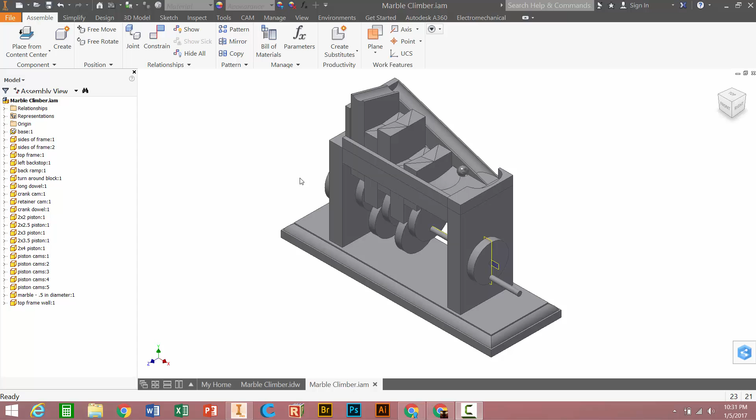So you finished assembling your marble climber and you're ready to start your documentation. Let's take a look at that.

On the first page, you're going to have a cover page with a nice isometric view of our assembly. Page 2 is a parts list with an exploded view, and I'll come back to this in just a minute. Page 3 is a multi-view of our assembly with an isometric in the corner, kind of a standard multi-view layout.

All right, the rest of the sheets or pages you do not have to do. Those are just there for you to make all the parts and pieces needed to create the assembly. Also remember to put all your sheets in one file. Right click, new sheet, and you can add as many sheets as you need, but in this case you would have 3 sheets in your browser.

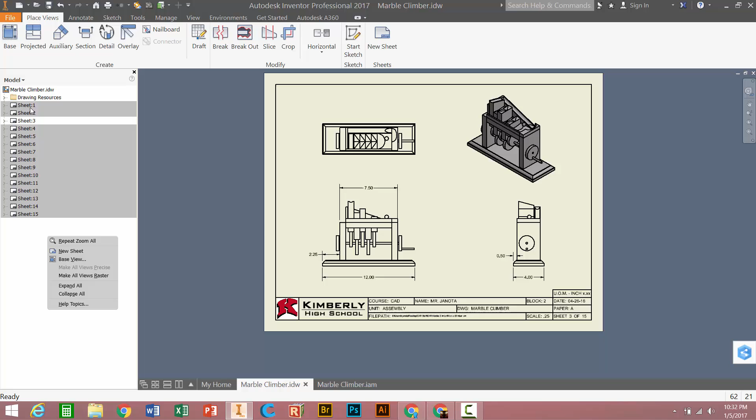All right, let's look back at sheet 2. Both these things are kind of new to us. First of all, we have what's called an exploded view. So we have to create a file where we actually pull these things all back apart.

And I know we spent all that time putting them together, but we can create this cool little animation with a certain file called a presentation file. And then once we have this in here, we can drop in our parts list. Okay, so let's get started.

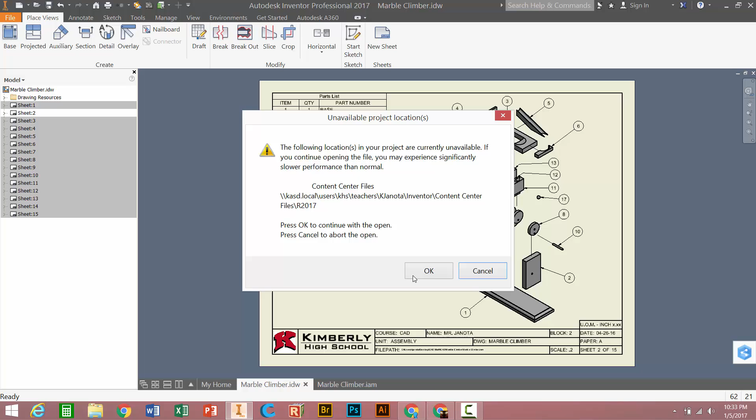We're going to start a new file, and we're looking for a standard IPN file. Don't worry about that, it's just a box I get on my laptop.

And right away the file is asking us to choose something to put into it so we can do some work, and we're looking for our marble climber file. And here it is. It's kind of similar where we have our browser on the left and there's this snapshot window here that we're not going to use at the moment.

There's a storyboard on the bottom, which means kind of a video or animation, and we'll get to that at the end of the file here.

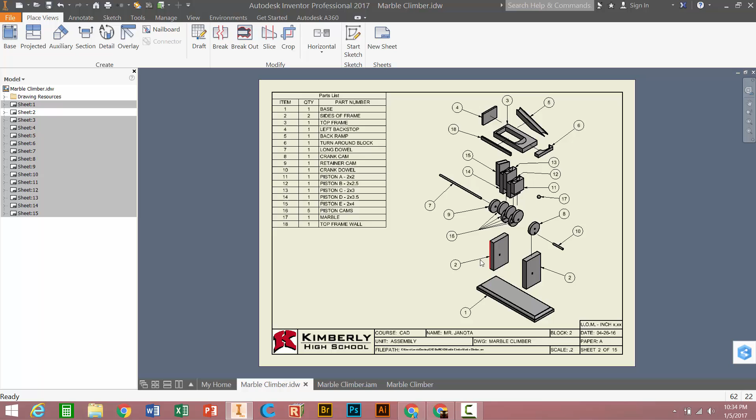What we need to do is, again, remember, look back at your drawing file. It'd be great if you throw this up on your other screen. We're going to pull our object apart, and you're just going to visually look at the spacing of all the parts when we're recreating it in this file here.

So with that, the tool we're going to use to do everything is called the Tweak Components tool. You get the little window that pops up, and the only thing we really have to do here is change where it says All Components - we're going to set it to No Trails.

Trails are like lines that get left as we drag things apart, and sometimes they're just busy and don't look very nice.

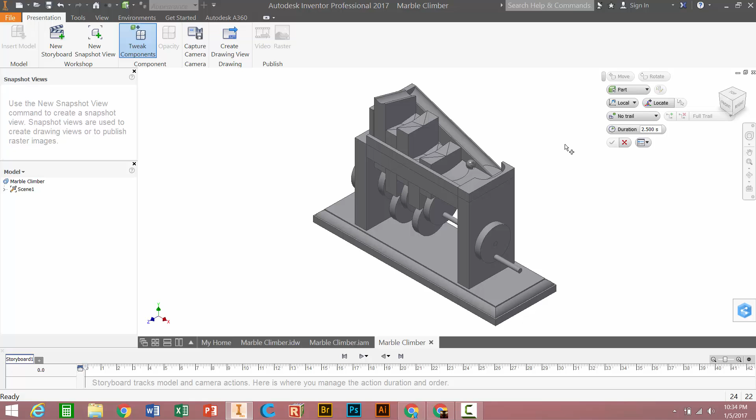So with that, we are going to - sorry, I'm just adjusting my other screen so I can look at the document and recreate what we need to.

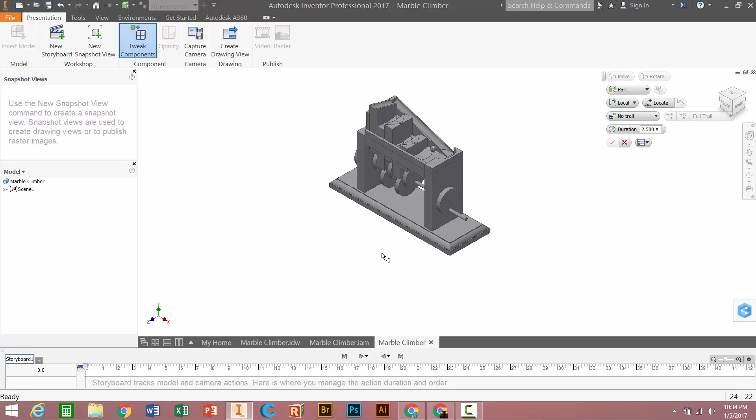We're going to pull the base down, so this is a good practice part to start with. You're going to just click on the object you want to move, and you see you get the triad that shows up. I'm just going to pick the axis - even though the arrow is up, I can really slide it in both directions. So it's the z-axis, y-axis, but to me it's up and down.

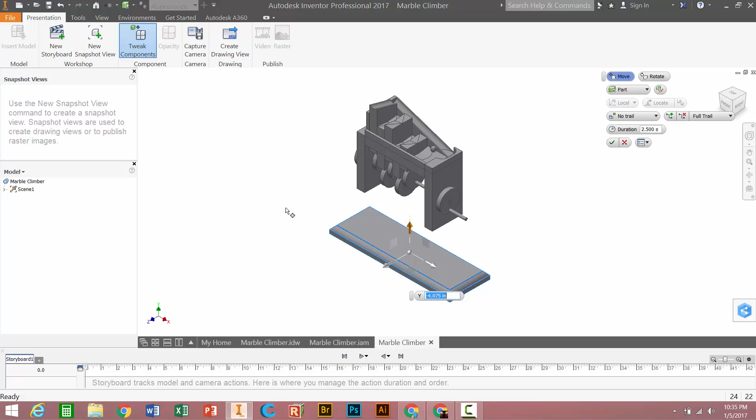Just grab that arrow and pull this part down a little bit, and right about there's the spacing I'm looking for. We could hit apply and cancel the window and go right back into it, or you should be able to just double or click on the next component and move it as well.

Looking at the drawing, we actually leave the 2 end pieces alone, and now everything else needs to move up. So while I'm holding the shift key, I'm just going to start clicking on all the other components on the screen.

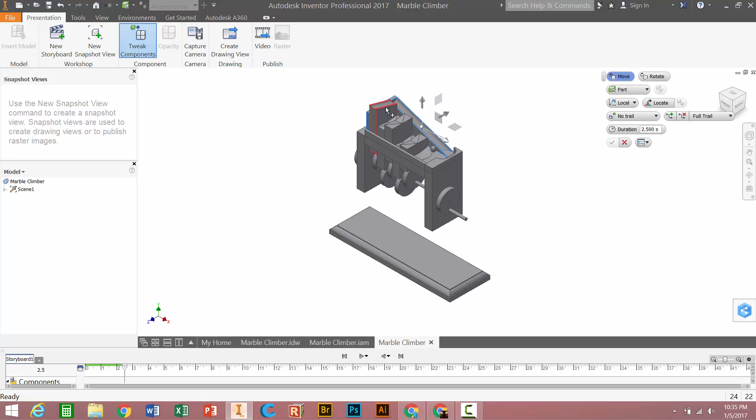There it is. Sometimes you have to zoom in. The other thing you can do is you could always expand this over here, and there you can see all our files as well.

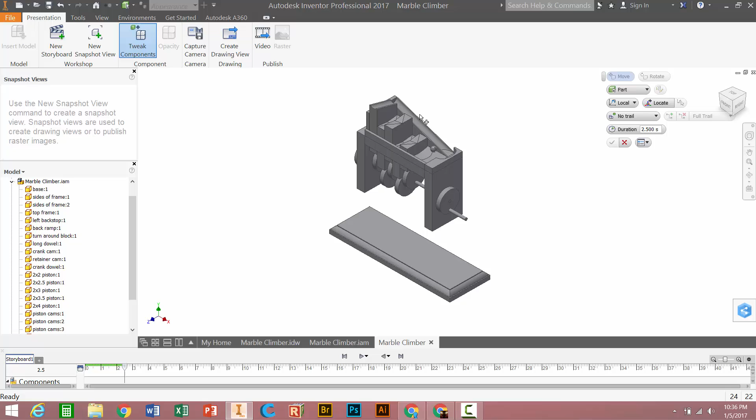Unfortunately that deselected for me, so I'm just going to click quickly back on everything. Then we can go down below and click here, here, marble, back cam, this cam - I accidentally clicked on this block, so I had to re-select it again. Clicking on it once selects it and adds it because I'm still holding shift, and then if you click on it a second time, it deselects it.

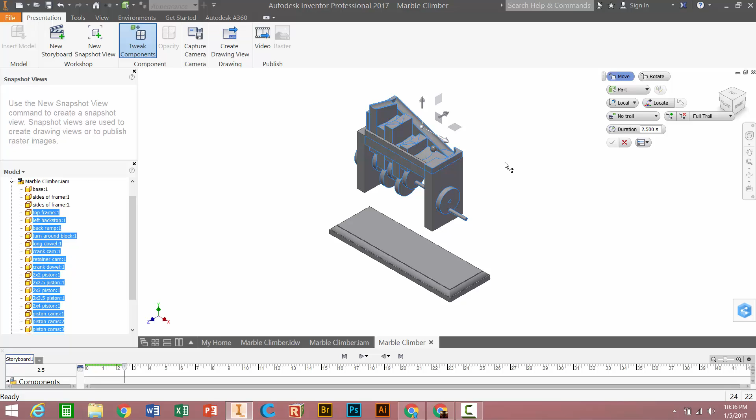All right, so I let go of shift key. I think I got everything. I'm going to zoom out a little bit so I have some space to pull this up. Grab the arrow, start moving up. Oh, look at that, I missed something.

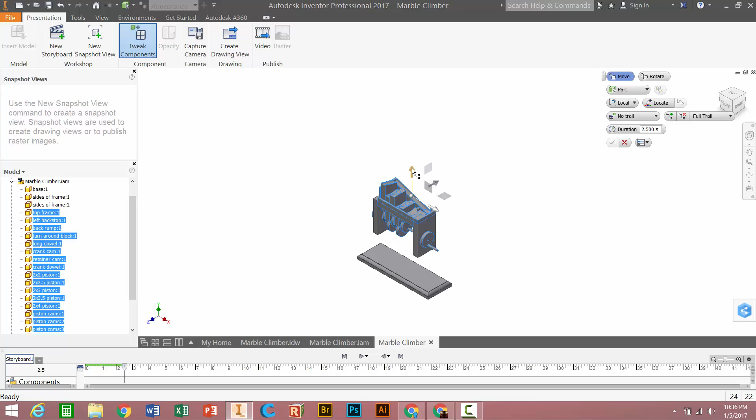So what I do is, this box is active - I just type 0 on the keyboard, puts everything back. Hold shift, click that last part. Let's go again. There we go.

And I'm kind of taking note of this spacing right there. It looks pretty good. Holding shift, I'm deselecting, and again, zoom in - makes it way easier. There, I just deselected all the cams.

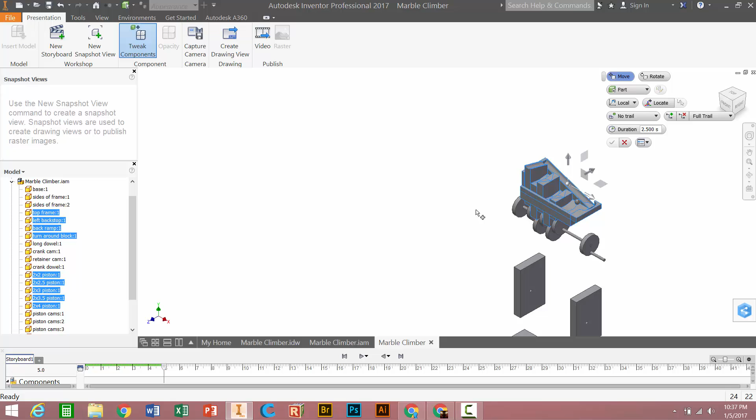And I'm going to grab and go up again - about there, it looks great. Hold shift and deselect the pistons.

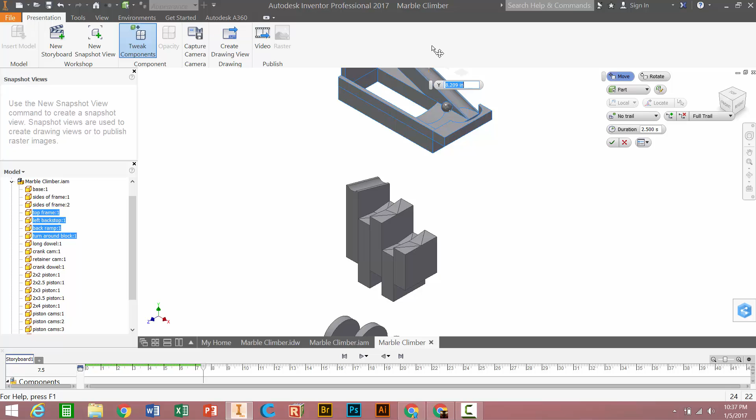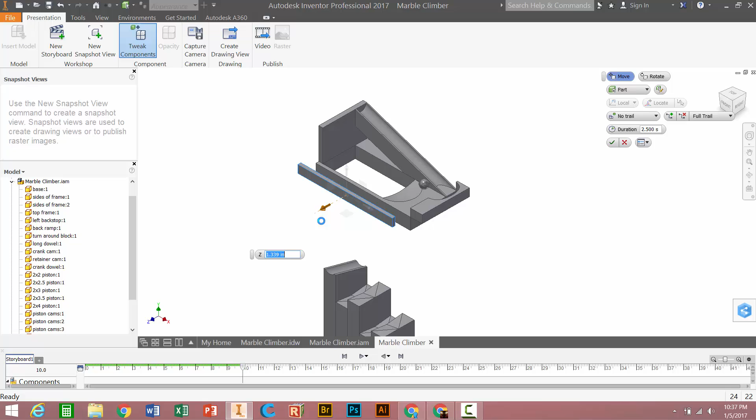This one's just the easiest to actually click the apply button and then go right back into tweak. Grab that part and drag it off to the side, and that's why we left a little bit of extra space, because we fill it back in with this side that goes right there. Grab the other ramp, drag it off that direction, the back wall this way, and our front one here.

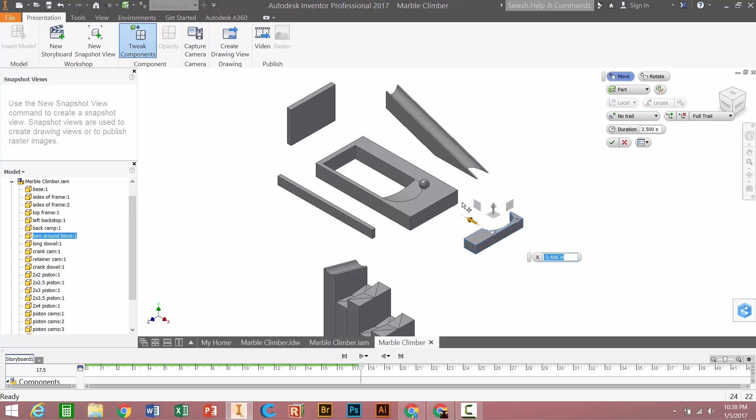Oh, I missed one thing. The marble was supposed to be way back here. I can click on it now, just drag that guy right back in there. That looks good. And apply. And there we go. That's an exploded view.

It shows us kind of how things relate spatially while pulled apart. But the other cool thing now is if you click down here on your storyboard, rewind the part. Look at that, back to assembly. Click play. And you get an animation of how your part kind of goes together and relates.

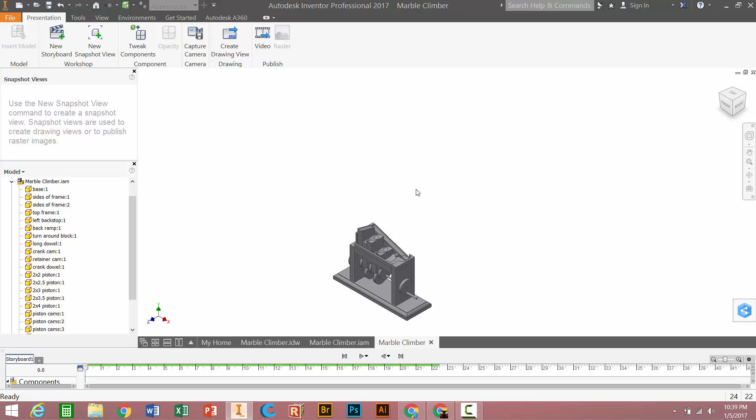I'm going to have one little mix up here because that marble, it'd have been better to drop him off with the cams in this scenario. So it looks like he's falling back down, but that's okay. In the end, as long as we get everything where we want it, that's what we're after. Okay, so click save and call it the marble climber because it's an IPN file. It can have the same name. It's technically a different file type, and you are good now.

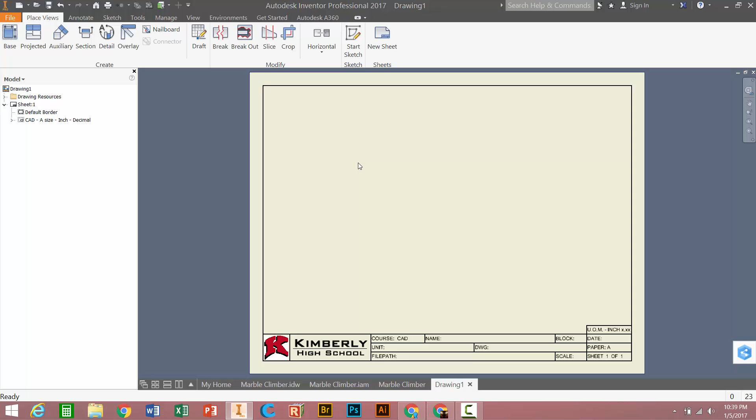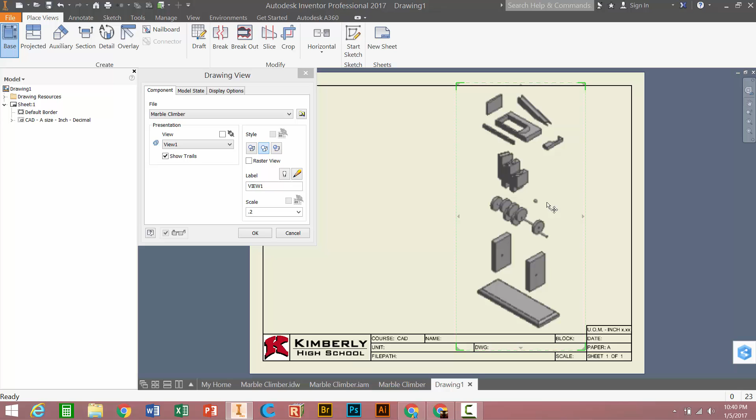Start a new file. You have a blank document, and do a base view, and here we go. Scale is... oh, my other screen's not showing it. There we go, 0.2, sorry, 0.2. Remember, you can move it around, get it to just fit in there. Looks good, except I want a little more to the side, so I got room for my balloons and my parts list, and we hit OK.

It's not shaded, so I just double click it. Let's shade that, click OK. Awesome. Okay, so that's our exploded view.

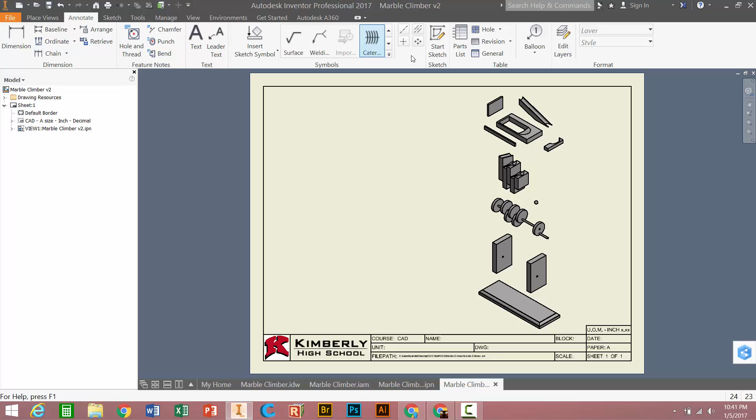And we go to the Annotate tab, and right over here is our parts list. Click on that tool. It says, hey, can you select the view, please? I sure can. Go over here and click OK. And there's the list, and snap it in the upper left corner. And there we go. You have a parts list started.

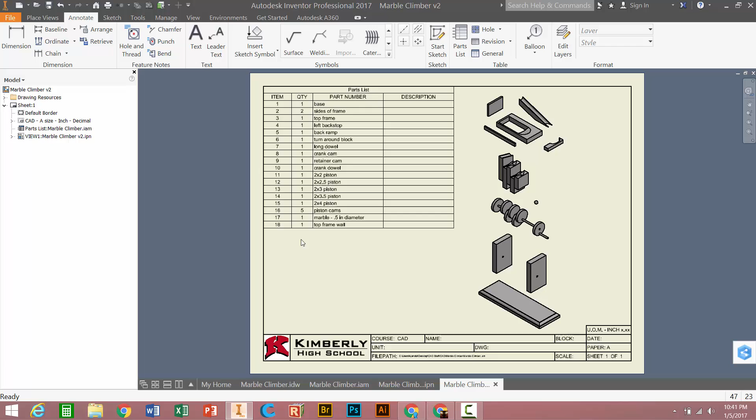We have to do a little work on it, like a lot of things always, but at least it's started. If you want to edit the parts list, you double click it when it's red. Okay, and actually anywhere, I usually try to double click on any of the text. That takes me into this window. First thing we're going to do is get rid of description.

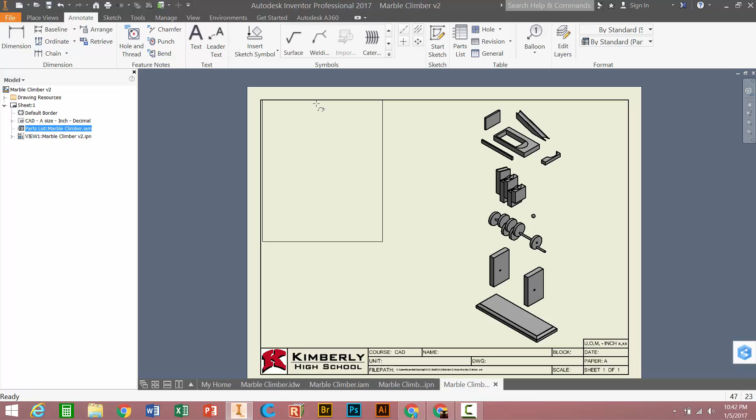So column chooser right there. Click on the column that we want to modify and then remove it. Click OK, and I'll hit OK again just to see that happen. Again, the text tends to work best for grabbing or double clicking, so I'm going to get a hold of it. It should snap right in the corner.

And then what you need to do is double click it again, and you can modify any of the words in this list. The main reason I need to modify mine is because I want them capital, because that's what we do in CAD. Base. Enter. Oops, sorry, don't enter. Let's click OK. Okay, let's make sure we didn't get an extra space in there.

Double click again. And here we're looking for sides of frame. We'll want to click line to line, top frame. And what happens is the parts list is bringing in all these parts using their file names. So if I would have done them all in capital letters right away, it would have been great. But not really that big a deal to switch.

Now the other issue you guys will have is because not only is it using my file name, but these are stacked in the order that I placed them to create the assembly. There's a pretty good chance that you are going to have a different order, just switch them up as needed. Make your parts list look exactly like mine, and that's what we're after.

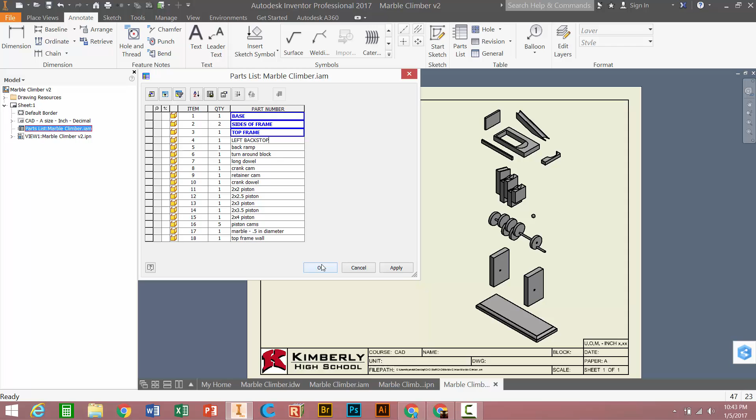We hit OK. You can see the ones I've modified. And that's no big deal. The only other thing you have to do is when we put on our balloons, there's the balloon tool. Right down here's number 1. The first click represents where the arrow starts.

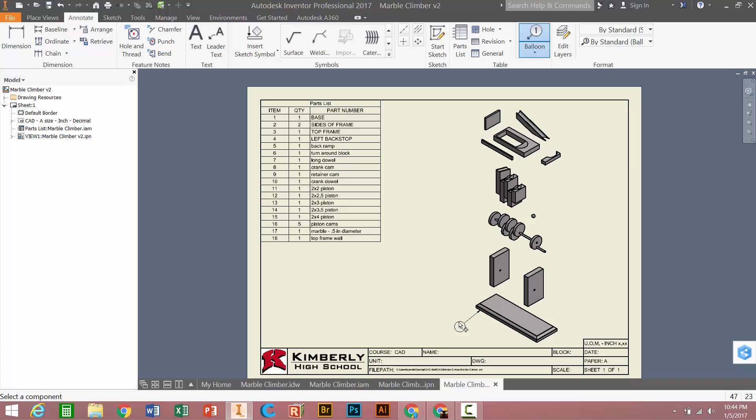The second click is our elbow or continue spot. Right click continue, and I just leave it. There's our 1. Now if yours is 1, that's great. And this one, I would say most of you should have the same. But when you get to the next one, it could be here right away where you're different. And try to place your balloons where mine are as well. Again, you're always trying to copy me.

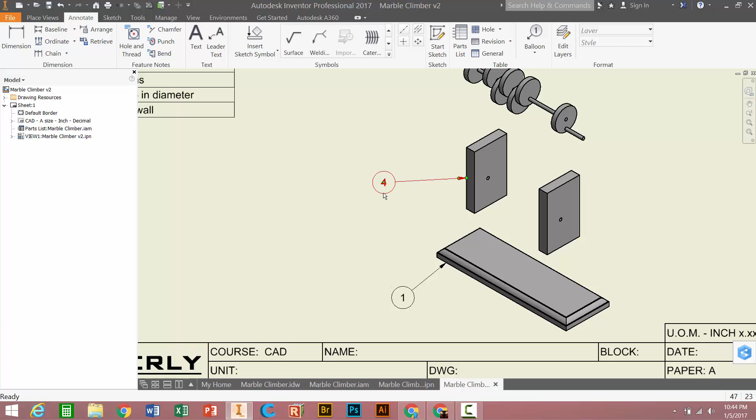If this is not the same, I escape to cancel the tool. You can double click these, and again, that pops up with a little window, and we can make this say whatever we need it to match the parts list. So in this scenario, maybe it did come in as 4, double click it, make it 2, and click OK. Alright, so it's pretty easy to make everything match. And that's your parts list and exploded view.